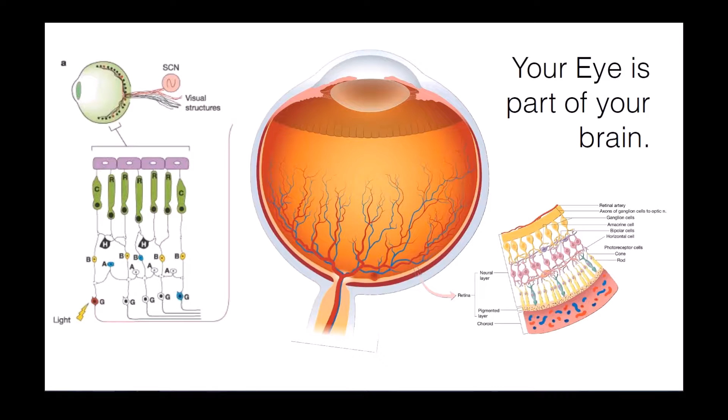And so the exposure of our eye to daylight starts this whole circadian response of hormone production, like melatonin, a hormone that acts as an antioxidant and protects the body from harmful radiation, serotonin, or the hormone of pleasure, dopamine, cortisol, etc. So it becomes apparent that the succession of day and night plays a vital role in this entrainment, as it affects our mood, our ability to focus, our motivation, learning ability, memory, blood pressure, body temperature, as well as reinforces our immune system.

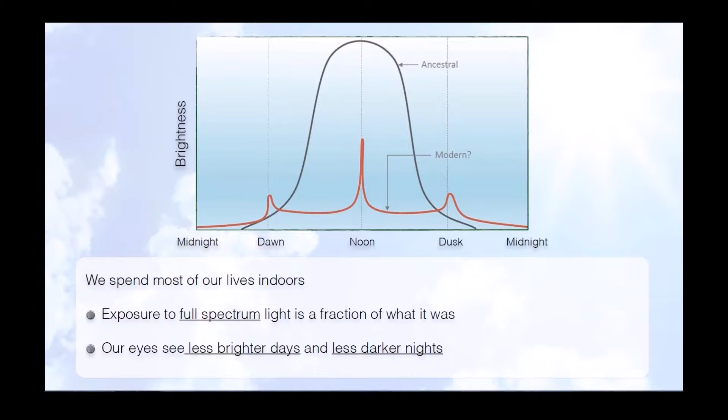And then there is another small bump there where we get back into our cars to go back home again. So our eyes are seeing less bright days and less dark nights, in only a few years since this change happened. So this is bound to have an impact. And here is the impact that I see. It's that we seek daylight both in our natural environment as well as our built environment, because it is something that is missing from our everyday lives.

We always prefer natural daylight to any other type of light, and we are more attracted to well-daylit buildings, like that of a library, for example. The first thing we do after choosing our book is to look around in search of a window to sit by and read. And this is something that happens not only in the library, but also in the airport or in a restaurant. Unconsciously and at all levels of consciousness, we really do crave daylight.

Here we can see some of the greatest benefits of natural daylight. Well day-lit environments increase occupant productivity and comfort, improve their health, and lead to substantial energy savings, which is a very important factor as well, up to 80% or even more.

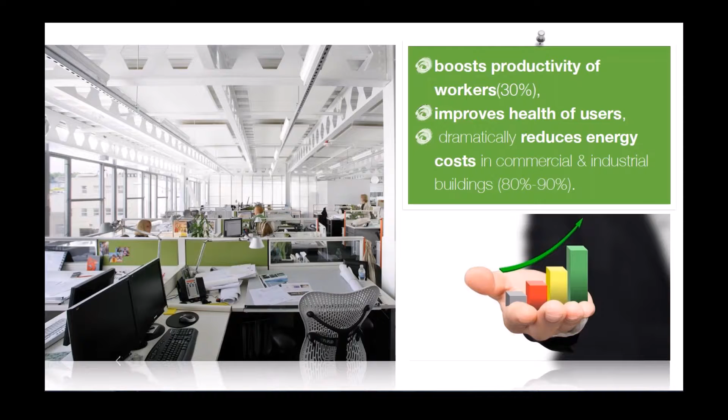At this point, we should also note the unique property of natural daylight to fully render the color spectrum. Here we can see different light sources, their respective color temperatures, as well as their corresponding spectral wavelengths on the right. Natural daylight ensures the most accurate color rendition, which is especially important in stores and supermarkets, where the visual quality of the products plays a key role in sales.

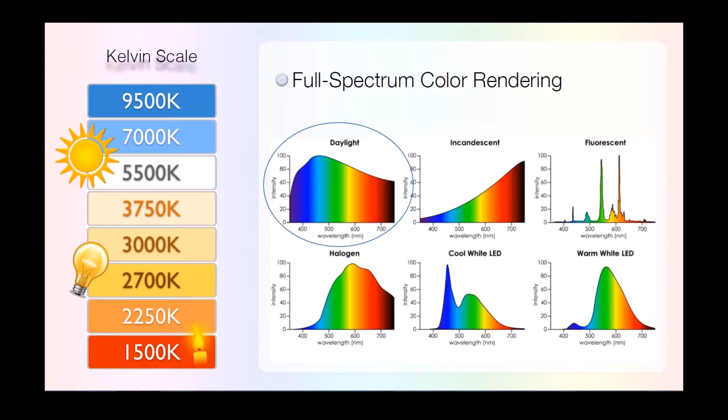But you should be warned, this does not only concern the industries of paint, varnishes, furniture, and publishers, but could save anyone from something like this. Or sometimes you may choose an outfit at a store because you really liked its color, only to return home and find that something went wrong. This is not the outfit that I bought. This has a different color.

So if daylight is this amazing phenomenon that we enjoy so little compared to our ancestors, why don't we construct buildings that are flooded by natural daylight, buildings that are a pleasure to use? Well, the main reason is that it is very difficult to design buildings with sufficient and good daylight penetration. The architects in our audience have surely experienced that.

To begin with, the sun is a constantly moving light source. Weather conditions and cloud cover patterns change seasonally, which makes them the most unpredictable factors by nature. Orientation is a very important factor, but also one that we rarely have control over. Openings bring in light of completely different qualities, depending on the direction they point to.

Glare is another issue. By trying to bring more light in, we often have undesirable results, as glare goes hand in hand with direct sunlight. And last but not least, the occupants of a building will adjust the blinds of the windows to achieve personal comfort, which makes them a factor as unpredictable as the weather.

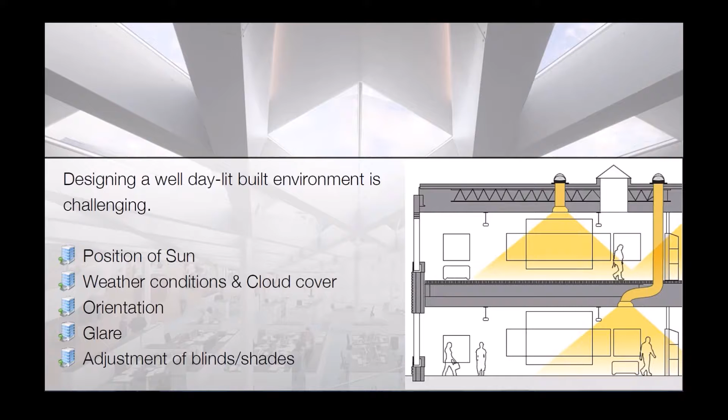When architects are called to satisfy a brief, they will design the way most architects were trained to design, which is for the worst-case scenario. And so we end up designing the worst case. This is a building similar to so many other buildings, office buildings around the globe, a glass box that does not necessarily have a very bright interior. In fact, this particular building is dark and has a terrible visual quality in its interior.

The light has a tint of blue that the occupants hate, and in order to counterbalance this effect, they will keep all the lights on all day long, even if the sun is shining outside. And when the sun hits the facade, as there are no overhangs, and the sun still shines through the tint, the glare forces people to close the curtains, which they then usually leave closed, as they don't like the bluish light that comes through the windows anyway.

So we have this terrible waste of materials and energy in a building that, in effect, achieves the exact opposite of what it was intended to. It makes us wonder what happened when this building was being planned. What line of thought led to this? Most probably the brief called for large windows with unobstructed view of the surrounding garden. So the architect responded with this tinted glass box in his attempt to reduce the solar heat gain by not more than 5 to 10%.

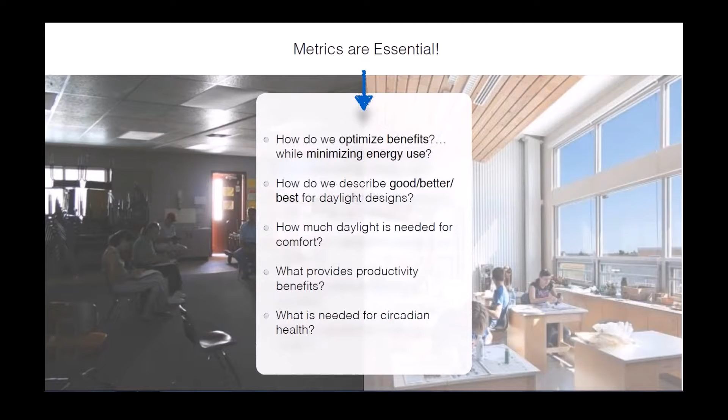How much natural daylight is needed for optical comfort? What provides the highest productivity benefits? What is necessary for a healthy circadian rhythm? We want metrics that are sensitive indicators of good daylighting, that allow designs to be optimized for the most energy efficient means to deliver comfort.

With a starting point of no less than a dozen already in use but way out of date daylighting tools, including the infamous daylight factor, and after studies that were conducted for 2.5 years in 61 buildings, they came up with the new metrics. The study comprised a questionnaire regarding general comfort levels experienced by occupants in each space, handed out to 5 lighting specialists and 10 users. The results were carefully compared with the results obtained by lighting simulation programs,

and 2 calculation systems stood out as getting the closest to actual occupants' evaluations, since the reason driving all this is occupant comfort after all. The tools chosen were spatial daylight autonomy and annual sunlight exposure. In 2012, the IESNA, or the Illuminating Engineering Society of North America, officially adopted these 2 systems, with LEED following closely after. So these are the 2 indicators that came about to ensure the adequacy and quality of natural daylighting of the interior of a building.

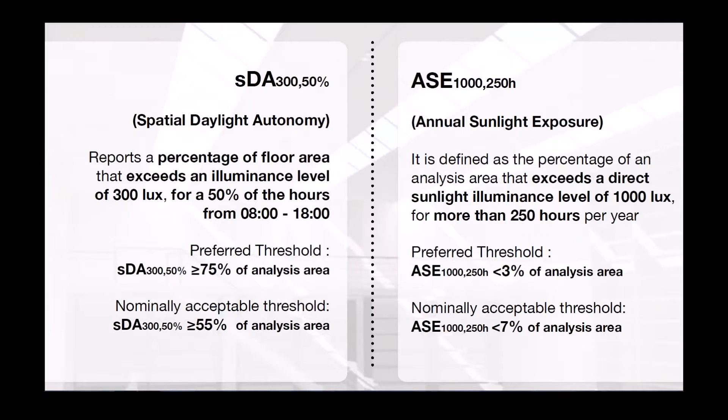So now we have a new, much more accurate metric system for calculating natural daylight penetration, since it is sensitive to important factors such as climate, sun angle, orientation, facade design, space geometry, furniture layout, as well as blinds, which are not just decorative features. As a result, the new metrics reward spaces with less direct sun penetration, like spaces with well-designed overhangs or spaces with north orientation.

They reward the spaces with deep daylight penetration, which means they might have a higher window head height, or they use light redirecting technologies. Spaces with multi-directional daylight, like spaces with windows on more than one wall, or a combination of windows and skylights. A piece of important information that came up through this study was that we have the best natural daylight penetration from the roof level, meaning that openings in the roof bring the natural daylight most efficiently into a building.

On the other hand, the new metrics penalize spaces with no blinds in the windows and no overhangs, so spaces that admit too much direct sunlight. They penalize deep spaces, like spaces with large floor plans where a large portion of the occupied space is away from a daylight source. And they penalize spaces with low daylight levels, for example spaces with dark or small windows.

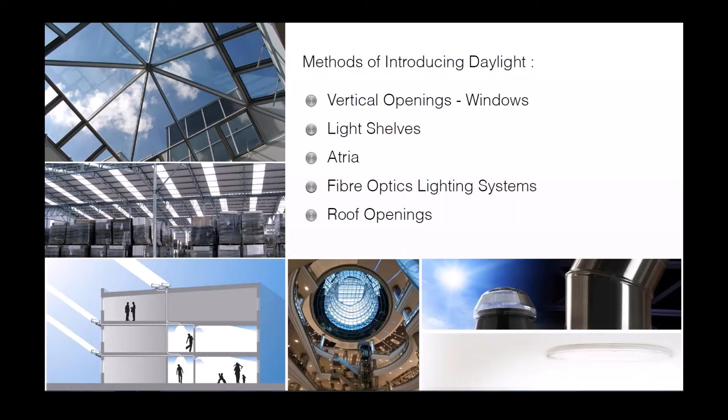Here we can see some methods of introducing natural daylight in our buildings. We have vertical openings or windows, light shelves, atria, fiber optics lighting systems, and roof openings. Let's see them in more detail. Vertical openings, windows. It's a key method of achieving communication between indoor and outdoor environments. They are valuable tools if used correctly, and orientation and weather conditions are very important.

Few people know how to properly utilize the vertical openings on the sides of a building. One of the major factors to consider here is the orientation of the building. Small openings, few in number, are recommended on the east and west sides of the building so that we can avoid overheating in the summer. The same goes for the north side, where preventing heat loss during the winter is what we're looking for. The south side is the favorite.

Now looking at this through a bioclimatic design angle, bioclimatic design says that it's ideal to cover the south-facing facade with 60% of it in windows. It is a bit dangerous, because these south-facing windows should be equipped with horizontal blinds in order to protect the building from overheating during the summer, and with some proper planning these can serve as architectural light shelves as well.

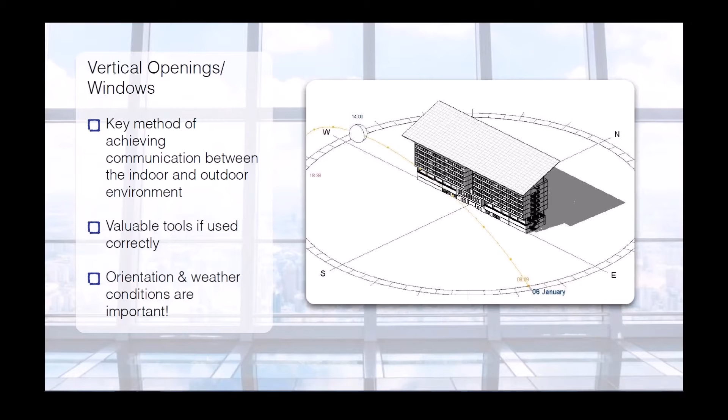A light shelf is a horizontal surface that reflects daylight deep into a building. Light shelves are placed above eye level and have high reflectance upper surfaces, which reflect daylight onto the ceiling and deeper into the space. The reflectance of the ceiling, therefore, is also important. This design is generally used on the equator-facing side of the building, which is where maximum sunlight comes from. So in the northern hemisphere, it's the south-facing side of the building. In the southern hemisphere it would be the north-facing.

During the summer, they prevent overheating. But not only do light shelves allow lighting to disperse deeper into the building, they also shade the area near the windows due to the overhang of the shelf, so they help us reduce window glare.

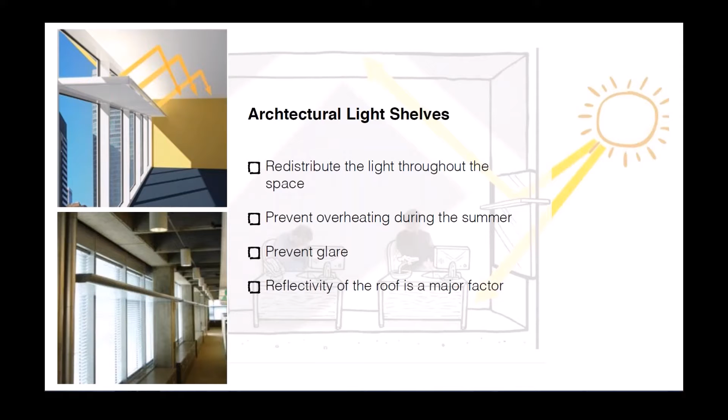The atria. An atrium is a large open space located within a building and constitutes a common building feature since antiquity. Back then they used to take the form of an internal courtyard around which the daily activities would unfold. Modern atria, as developed in the late 19th and 20th centuries, are often several stories high and have a glazed roof and/or large windows.

Atria are a popular design feature because they give their buildings a feeling of space, openness and light. Users like atria because they create a dynamic and stimulating interior that provides shelter from the external environment while maintaining a visual link with that environment. In effect, by reducing the depth of the plan of the building, we reduce the distance from the sources of natural daylight.

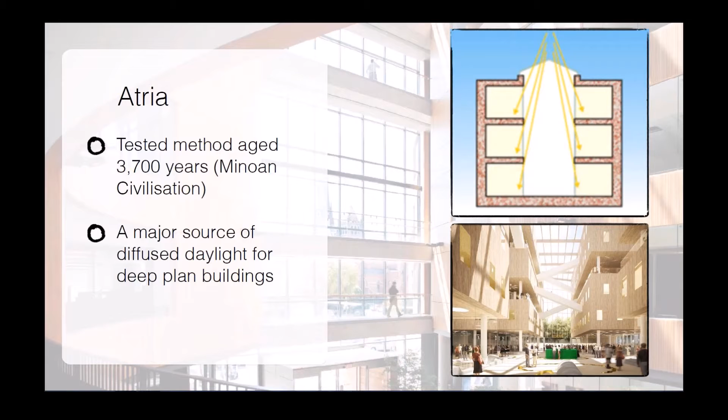We also have the fiber optics natural lighting systems. They are the latest technological achievement in natural daylighting. Their use for lighting has been rapidly growing in recent years, since they are easy to install, easy to maintain, secure, and suitable for a huge range of lighting applications.

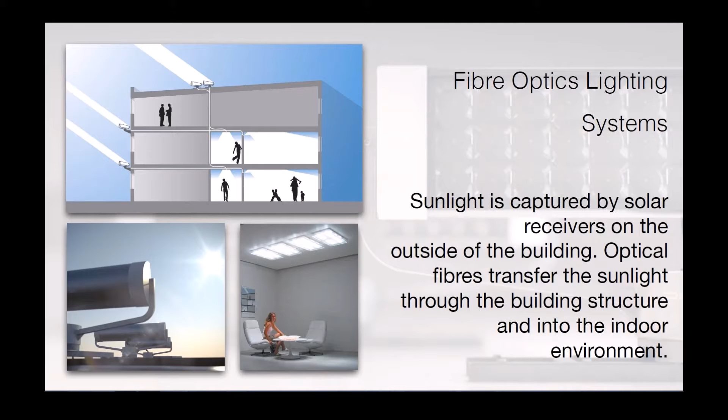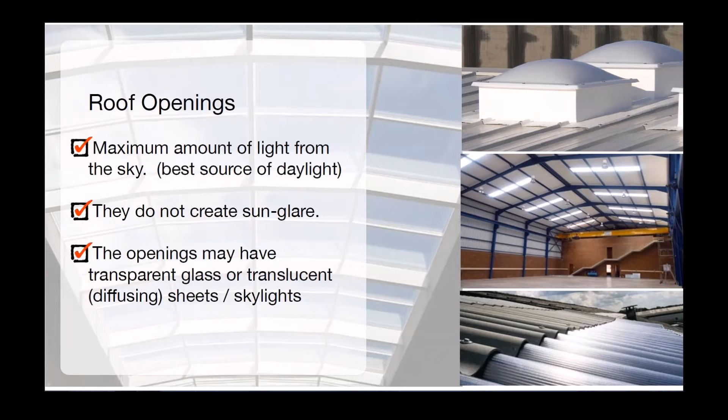And here we can see examples of roof openings. Such openings are skylights and tubular daylight devices. They have the best natural daylight performance since, as we mentioned before, the sky vault is the best source of natural daylight. They do not allow sun glare to occur, because direct sunlight falls through only when the sun is at its highest. And depending on the material used, we can have different effects of penetration and diffusion. But let's have a closer look at the kinds of roof openings.

Skylights are widely used, mainly in the case of industrial type buildings. They are pretty popular as a solution due to the good amount of natural daylight they allow through, but also due to their relatively low cost of supply and installation. Unfortunately, it is not a durable solution, as their material weathers and degrades with time, resulting in a reduction in performance and light transmittance, as well as causing leakages in certain cases. They also provide no protection from UV radiation.

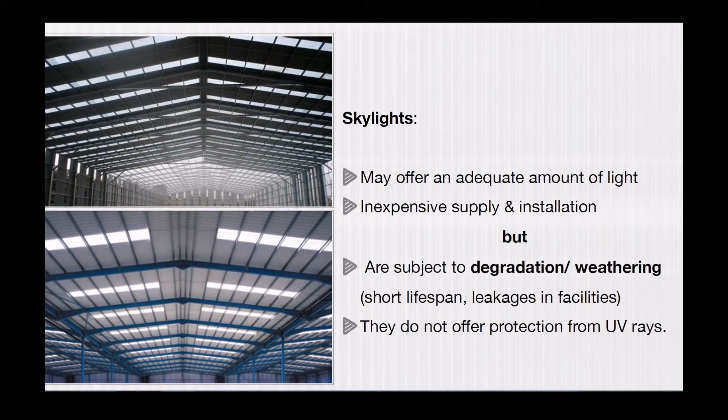But let us take a look at a more sophisticated solution like the tubular daylighting device. It's a comprehensive system that uses no electricity at all and simply takes advantage of natural daylight's basic characteristics like reflectance and diffusion. They consist of a clear polycarbonate dome, which is kept always clean due to the way it is formed, and allows the unobstructed entry of that natural daylight, which is then directed down an aluminium tube internally covered with a highly reflective ceramic film of 99.7% specular reflectance, to finally be uniformly dispersed into the interior through a diffuser.

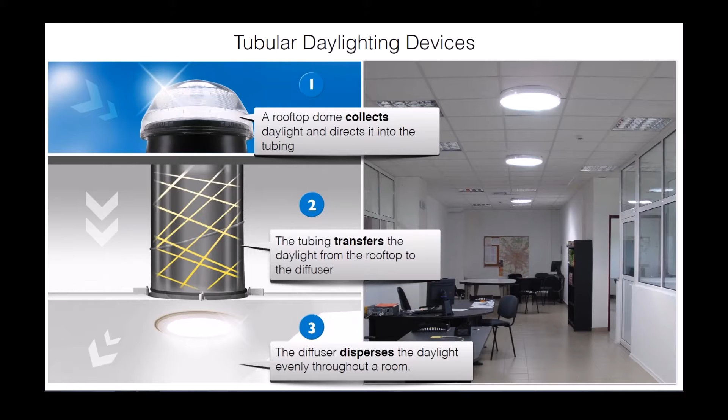They are usually installed in finished roofs of any roofing material. In the case of a concrete slab, it is best to create the openings during construction, during the pouring of the concrete, but installation in a finished slab is also possible. It is a system that has been applied around the world for over 25 years. In the Eastern European region, it is mainly installed in industrial type buildings as well as department stores and supermarkets.

It allows no heat transmittance, protects from UV radiation, performs superbly in both new build and existing building applications. But the most important thing is that they have a long lifespan with zero operational cost and maintenance.

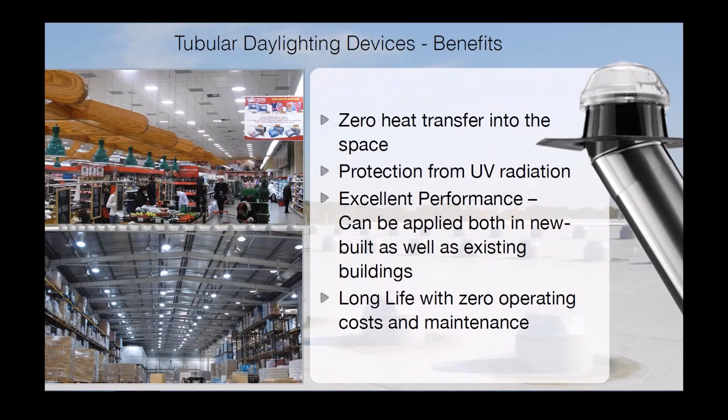Allow me to introduce to you the Ktisissol Group, a company which has specialized in sustainable energy services for 17 years, with products entirely in the line of energy efficiency. Apart from the tubular daylighting devices, Ktisissol Group offers the solar window, an innovative high-performance skylight with excellent quality but low cost, solar star ventilation systems with photovoltaic panels, the latest fiber optic lighting systems, and state-of-the-art LED indoor and outdoor lighting.

After years of experience in design and installation of natural daylighting systems in Greece, Romania, Albania and Cyprus, and excelling in the energy services provision sector, Ktisissol decided that it had matured in the field of maintenance and operations management, and decided to expand its activity to the full management of business facilities. Ktisissol, considering also the conditions prevailing in the market at this time, has started during the past 2 years implementing a new financing program for the corporations who wish to dramatically reduce their operational costs.